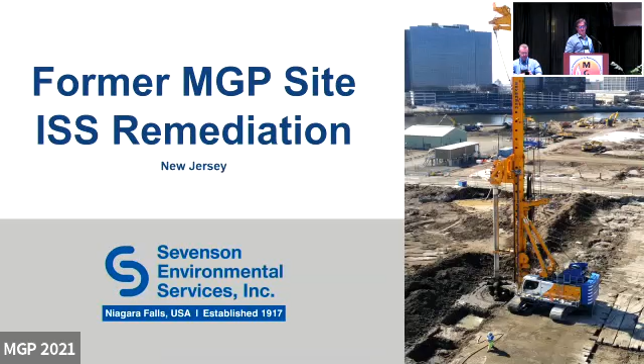So I'm here this morning. We're not going to talk about graphs or amoebas. We're going to warm our brains up to start the conference this morning so we can get into more technical stuff later on. I'm going to present a project we worked on over the last few years, an ISS remediation project in New Jersey. We got some lessons learned at the back of it, but we'll give you an overview and the flavor of the project, and some things on the engineering side, the contractor side, and the owner side that we can discuss further later in the program.

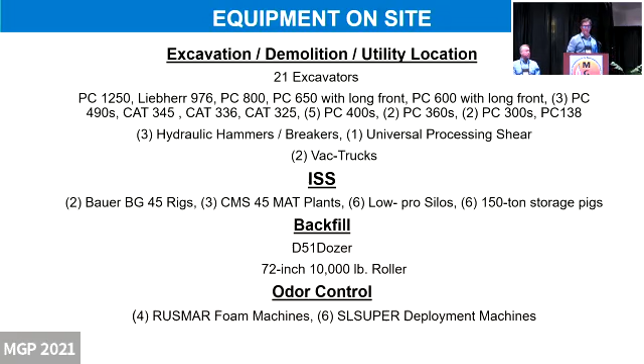I want to give you a little flavor of the equipment we had on site for this project. We had a PC 1250, a Liebherr 976, very large equipment, 21 excavators on this project to maintain production in the field every day. We had hammers, vacuum trucks, 2 Bauer BG45 drill rigs, 3 grout plants, 6 low-pro silos, and 6 150-ton storage pigs on the site. For backfill, we had a dozer and a roller. For odor control, we had 4 Rusmar foam machines and 6 SL Super deployment machines for SL Super, Biosolve, and similar products.

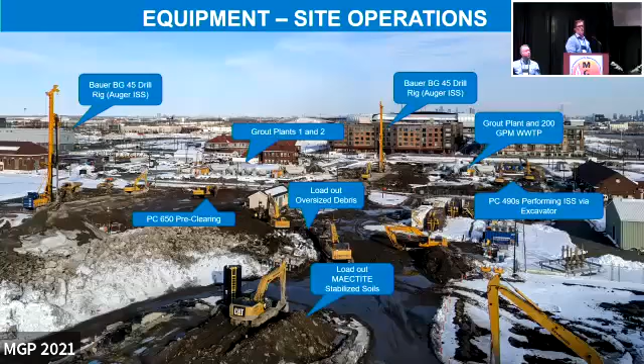This is an overall look at the site operations within the confines. Again, this is a big site, 37 acres, bounded by a very urban area. You can see the BG45 drill rigs, 2 on each side, and 2 grout plants centralized in the middle, plus a third grout plant, and the 200 GPM wastewater treatment plant on the outskirts. We have an oversized debris loadout processing area, pre-clearing for obstructions, bucket mixing, PC 490 excavators performing ISS to the back right, and we're treating lead-contaminated soils for loadout in big bags at the bottom. So there's a lot going on in this project overall.

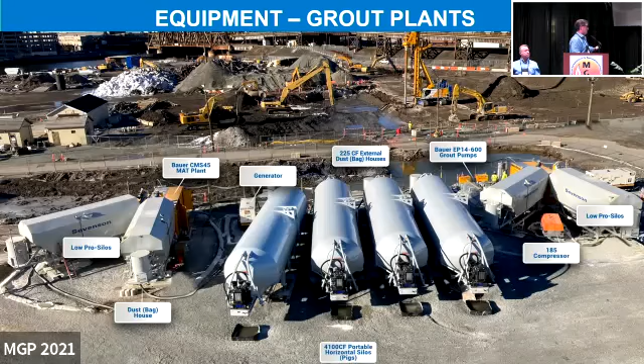This is grout plants 2 and 3, with all the components from power to storage to producing the grout. On this project we produced 60 million liters of grout for mass stabilization of the site. It was a logistical dance every day in the field to keep everything fluid. Roughly 25 reagent trucks, both slag and PC, came in every day. Everything was dust-controlled with bag houses, a perfect setup for what we had to do, with 750 runs out one way. The next day we'd change the grout hoses and move them to run the other way. Overall it worked out very well.

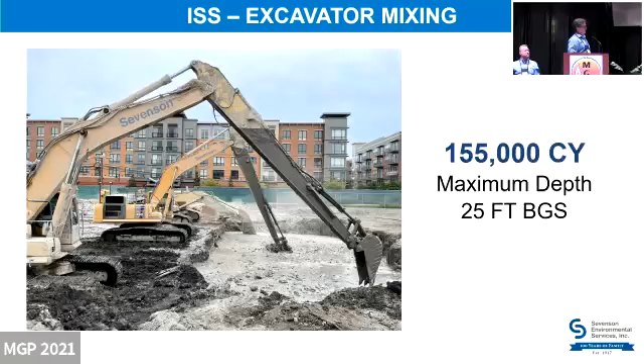We did 155,000 cubic yards with bucket mixing in some areas of a depth of 25 feet. We've had 2 to 3 to 4 bucket machines going on a daily basis. Some very tough material to get through, but you can see the work and the actual slurry that was being made in this particular photo.

On the drill rig side of things, there's a 10-foot diameter drill rig. We did 270,000 cubic yards with a max depth of 45 foot BGS, below ground surface.

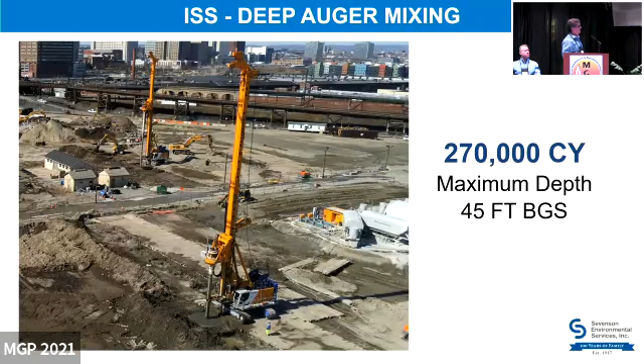The drill rigs had a state-of-the-art controlling device called the B-tronic system from Bauer. It gave us verticality, crowding force, blade rotation speeds, XY axis on all components, amount of grout liters injected, and feet per second of injected. This provided a great rig report at the end of the day for a QA QC type of report.

We could also log into this system remotely. We could watch from the home office exactly what the drill operator was doing, why maybe one drill was lagging behind another. We could log onto the system, find out if he was in harder soils, or if he hit an obstruction. Think of the data that this provided us - it was fantastic for QA QC reports. We could download probably about 1,000 columns within the system, find automatically with the GPS, get right over center drill point, and hold verticality down to those depths. So it was a great tool for this project.

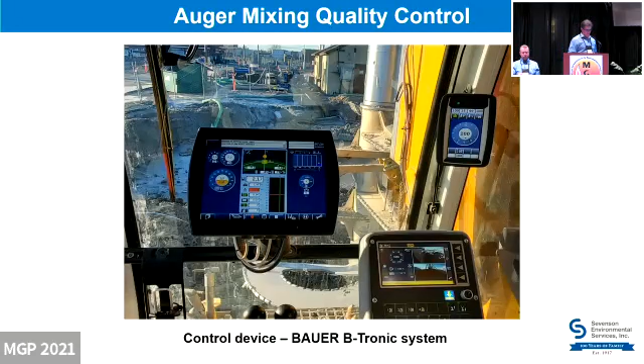Oh, I got her back. Sorry about that. So we had some other interesting components to the project.

We also had DeWind One-Pass trench on the site. We did 2,200 lineal feet of cutoff wall on this site, with depths up to 100 lineal feet deep.

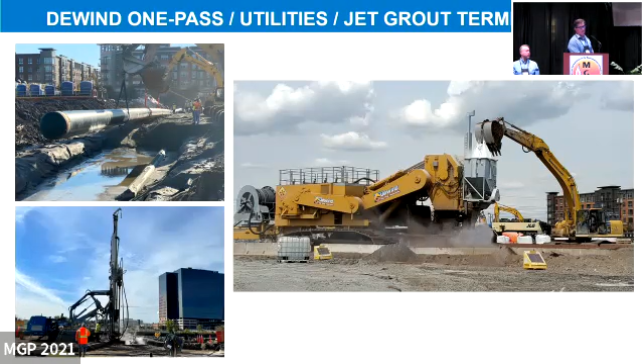On the bottom left, we had jet grout terminations around this gas line once it was done, to make a continuous plug to finish off the 1-pass wall. Depths of the jet grouting were 80 to 100 feet, covering a large area on the bottom of the facility.

So I wanted to talk about a couple lessons learned here. In the ISS type work in the arena, pre-clearing can't be stressed enough. This particular picture here is probably about 2 months into the project, and the amount of concrete and pier piles that we pulled out of the ground just to enable us to drill were enormous. It was an activity upon itself, besides all the other nuances of the job. We were pulling out concrete and pipe the size of small Volkswagens, processing them, sizing them. So I can't overestimate the importance of the pre-clearing here.

If they say it's down 7 foot, go 10 foot, because all it does is cause issues later when you're going to get a mix and you have an obstruction within it. It makes it a little bit easier - otherwise it slows the job. You've got 60, 70 guys on the job, the ISS drill rig comes to a crawl, you don't have any advancement on the drill. And then you start getting into conversations with the owner and the engineer about why you can't advance. You didn't pre-clear good enough, you weren't thorough enough with the removal.

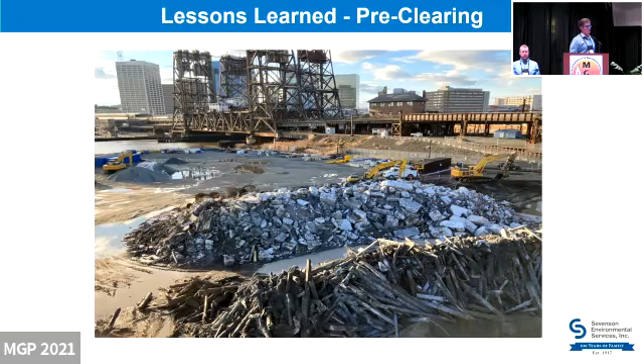On this particular one, we put out about 28,000 tons of concrete, and over 50,000 wooden pier piles were removed from the project depth. So the old historical structures on top - everything was supported by wooden pier piles within the hole. So we had a double layer of obstructions to pull out.

So we had another issue on the site. This was a meadow mat, which is a defining layer between almost water table and the natives or imported soils on top. The platform was to pre-excavate 7 feet, and the meadow mat was at -9. So we had a 2-foot buffer between the meadow mat and our stabilized platform to be able to work off of. So we found out that we had obstructions below 25 feet.

So what happens? You puncture the meadow mat, you start getting a tremendous amount of water in your excavation, your platforms, and the stability that you've got to put a 500,000-pound rig on starts to become compromised.

So what we had to do, instead of drilling and retreating as usual, was drill in advance out onto the meadow mat. We pre-cleared areas and got all the obstructions out of the way, then had to work from an edge and work on previously stabilized material in front, stabilizing primaries and secondaries in the middle as we went.

We had to find long runs where we could run this machine for 200-300 feet in areas that we pre-cleared, taking 7-8 days to go down to the end. Then we'd get all our QC data back from the laboratory, making sure the compressive strength was in order to get the rigs all pre-engineered.

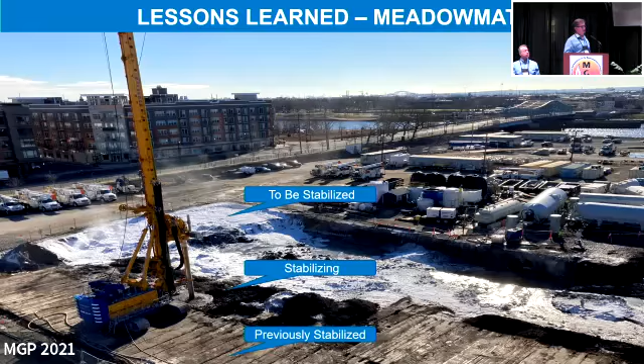We also had a very, very urban environment, as you can see here. Within about a half mile, we had 25,000 receptors in this area. We had an active PATH station nearby, an active facility, the utilities still working, and a little stadium in the backside.

So on this particular job, we used 365,000 gallons of foam for odor control, and another 76,000 gallons of Biosolve SL Super on the project, just to control odors. You can imagine a 37-acre site, we had to open up a lot of face, and we went through three seasons - hot, cold, hot, cold. We all know what happens in the summertime trying to control this.

I can't emphasize enough the amount of odor control and concern that we had around the community. We had constant outreach from the owner to the community, and a great group of air monitoring. We'd have odor walks every day just to try to maintain a sense of troubleshooting the project. But all in all, we did very well.

I can't emphasize enough the importance of odor control. It's one item that you really don't want to fall short on, especially when you're designing or building.

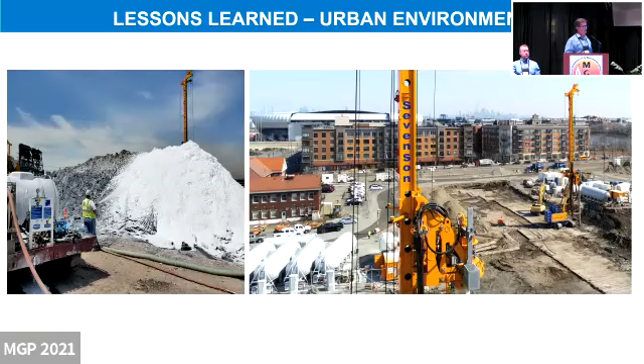And that's all I got this morning, guys.

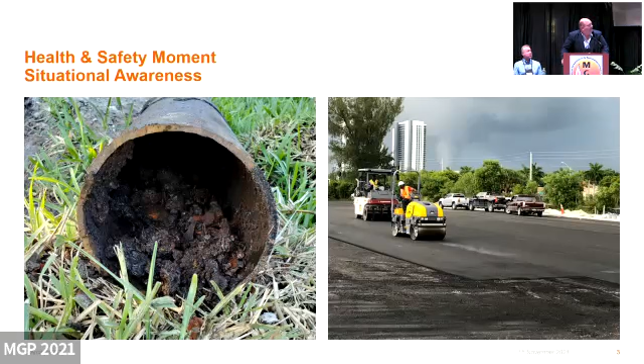So with that, I'm going to turn this over to John and he'll talk a little bit about the history and remediation.

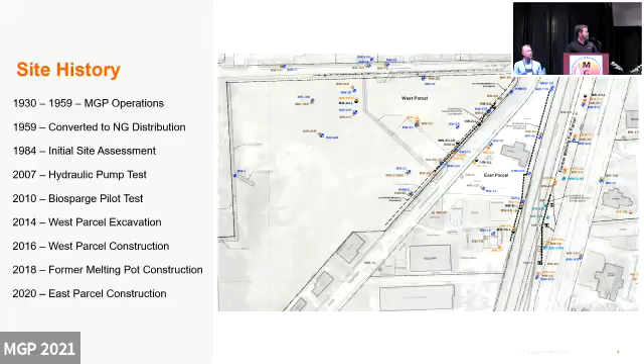The pilot test that mattered, or that we're currently following right now, is the biosparge pilot test, which started in 2010. You can see about every 2 years we did construction on this.

Okay, so I'm going to go through remediation quickly. We're doing biosparge and SVE at this site currently, but initially we did some soil excavation. So the west parcel is where we started, excavated, and then just more recently we did the east parcel. Typical stuff here: excavation top 2 feet, stained soils. We followed them down to the water table approximately and removed old structures.

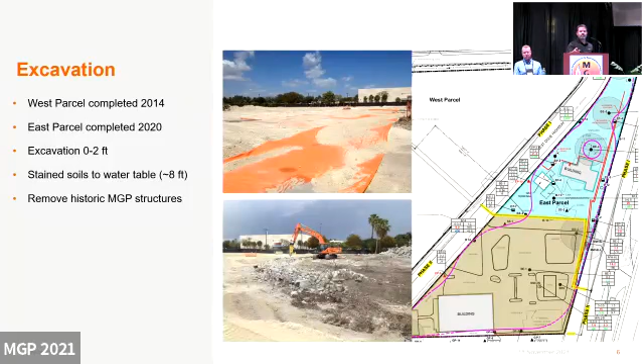The picture there at the top left is the delineator fabric that we have on the east parcel. It's obviously orange - that separates the excavation from the non-excavation. You can see below, we're pulling out a foundation for a tank as well. On this particular site, the excavation really covered almost the entire parcels. On the east parcel, for instance, the only things that were not excavated were the buildings. Everything else was pulled out, and also the regulator station, which you guys may see next to the building there.

Okay, so some interesting things about the remediation were the challenges we had with the installation. This is the west parcel, where we started first. Biosparge system, like I mentioned. The challenge we had here was West Dixie Highway was recently paved and the city would not allow us to touch their asphalt, so we had to bore under the road. With the amount of utilities out there, if we could find a way to not do a jack and bore under this very busy road, we were looking to do it.

So to our benefit, there were two 36-inch cast iron pipes that traversed the road between west parcel and east parcel, so we were able to utilize these pipes for our infrastructure. That saved us a potential utility strike.

One challenge we had is this put our SVE lines a lot deeper than we wanted. They're about 8 feet deep where we might want them typically around 2 or 3. So we had to install a sump on the east parcel side of the property because of that.

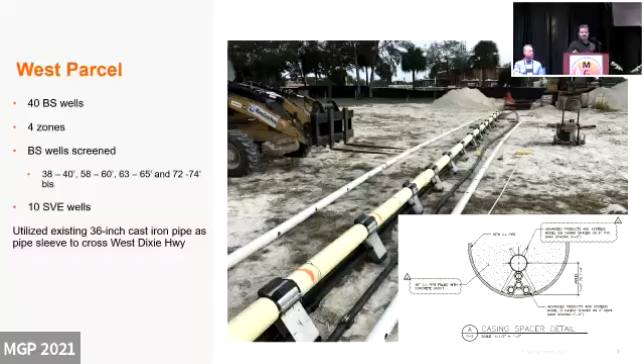Just moving on, I'm going to go through all of the different parcels. This is the former melting pot, much smaller transect of biosparge wells.

This is a kind of typical, almost like a gas station type air sparge system that you might have at some of your sites. The interesting thing here is we recently were able to get approval from the regulator to turn off the SVE system entirely, so we're just operating with the biosparge.

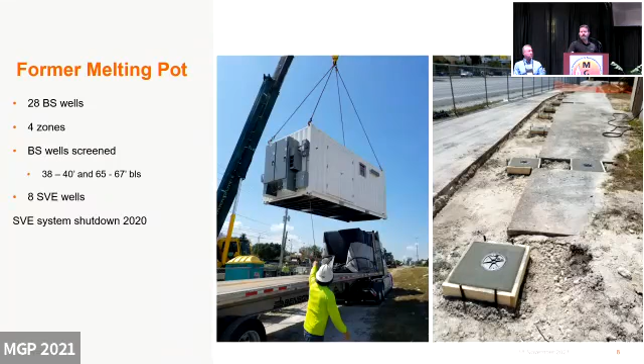The SVE, just so you guys are aware, was really put out there for methane control, which was a big concern for the regulator down here. This is Durham that runs this one.

Moving on to the east parcel, this is one of our larger transects. 63 biosparge wells operating in 8 zones.

Here, the interesting thing we did is this is a picture of the inside of the historic compressor building at the property. This building was built in about 1920, and as you can imagine, being in North Miami Beach, Miami area, property is very valuable. So we were trying to minimize our impacts or how much property we used up with our equipment. This was a historic building, so it had to stay in place.

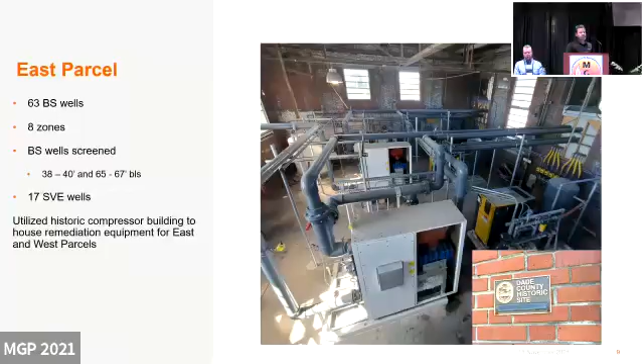So we utilized it to store our equipment in it. It was previously used just for equipment storage, so we moved some of that stuff out and put our equipment in there. You're looking at the blowers for the SVE system in the front, and the air compressors are in the back. So this is both the east and west parcels situated in this building.

And then just closing up before Mark gets to talking about redevelopment - another thing, as we touched the asphalt on the east parcel, stormwater came into play, and we had to do some improvements to what was there. Like I mentioned before, we had to maximize the usable property, but also considering the nature of the site, infiltration was really off the board. So detention had to be contained.

So what you're looking at here, and Mark's going to talk about it for a little bit as well, this is a product called Storm Trap, and it's a concrete structure used for detention of stormwater. This particular system you can build without a concrete floor or with a concrete floor. We built this one with a concrete floor, so everything is contained within those structures.

There's two of those, one on the north end, one's on the south. The south is a little larger, as you can see. These structures discharge into injection wells, and that's the picture at the bottom left there - that's one of the injection wells, that's the vault being installed there.

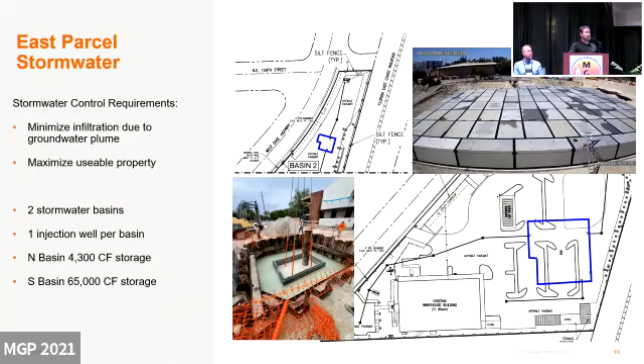And these injection wells are designed, they're cased to approximately 80 feet, and they discharge below any groundwater impacts. So this was a way we were able to maximize the owner's property usage and also avoid impacting our groundwater plume. So I'm going to pass it on to Mark, he'll finish up.

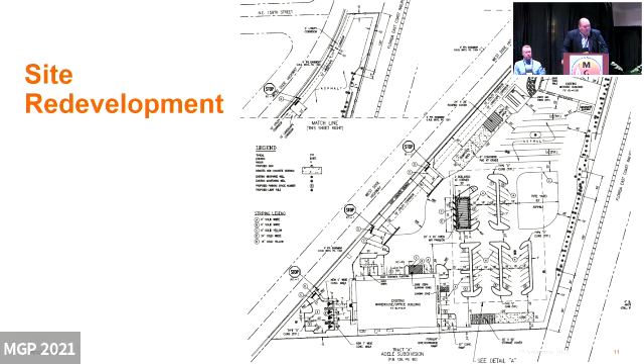Thank you, John. So in moving to the installation and remediation of the site, when we showed up, most of the site, as you can see in the pictures here, was gravel and grass, dirt. There was a small area in the south that was actually paved and used next to their facility. The rest of the area was the lay down and storage. So when we first got there, we had to do an unusual clearing and grubbing.

We were able to get there and help TECO. You see here on the left, the side where the SVE wells are, we had to go and help them - they had a lot of old stuff, they'd been there since the 1900s. So with most people who were around long, you start collecting and having things. So we were able to help them.

This picture on the right's a piece of equipment that wasn't working - you see we had a tree growing through the engine. We came there with big equipment, and we were able to pick up, move, and help them load this - things they weren't able to do themselves. We were able to get there and start, and when we started the remediation, we also came in and helped clear their site and make it available.

One of the things that is unusual about this site is that it had to remain active. This facility services the whole Southeast Florida, and all of the emergency response, all of the utility strikes, breaks, repairs, leaks are run out of this facility. This facility had to maintain operation 24/7, 365. We could not shut the site down, we could not impede their work at all.

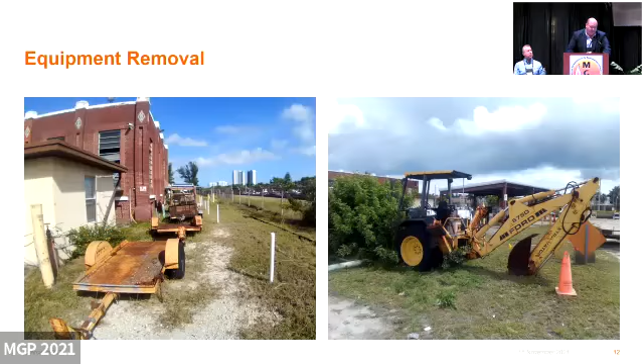So one of the things we did, here's a typical contamination you might see at MGP sites: the tar, the goo. The middle and right pictures show the tar pit by the old historic building.

This is an active site and TECO has people showing up every day to work, so we had to make sure that when we did these activities, we weren't exposing the workers. This was a concern of TECO, the regulatory agencies, Arcadis, and ourselves. We wanted to make sure everyone who worked there was safe and not exposed.

This took some special steps. We had to put physical barriers, temporary fencing, at a safe distance to keep people from coming into our work zones, and to keep them from being exposed we had constant air monitoring. This pit, when we were digging it, we had to go to level C because of benzene.

There was another area on the site where the same thing happened, and it was a great concern that people just coming to work every day weren't exposed to this. So what we did is sequence the whole site. We divided it up, and in order to take land from them that they were using, we had to provide some place on site for them to use.

So we started with the north end, cleaned and prepared the north side of the site, brought it up to asphalt, and then cleared the western section to give them a clear corridor to the building. So as people came to work every day, they could park and then go, because currently they park down south. And as you'll see in some slides later, we completely took their parking to finish this project.

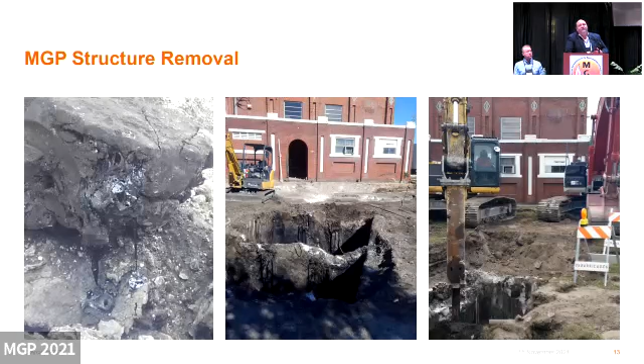So here we are on the west side, clearing it down to the building. Here's one of the regulator stations. You can see from the pin flags on the left, we have a lot of gas lines coming and going there, so that's all handwork. We had to get out there and excavate by hand.

In the middle picture, you see we have some MGP lines on top of the active gas mains. Those all had to be removed, cut out very carefully. That facility right there supplies all North Miami Beach and Miami Beach with gas.

And of course, being a 100-year-old facility, there are all kinds of utilities out there. We took a lot of effort, did some geophysical investigation, identified tons of anomalies, and had to go out and do some soft digging. That picture on the right shows us soft digging, trying to identify the anomalies and figure out which utilities were live versus the myriad that were no longer active out there.

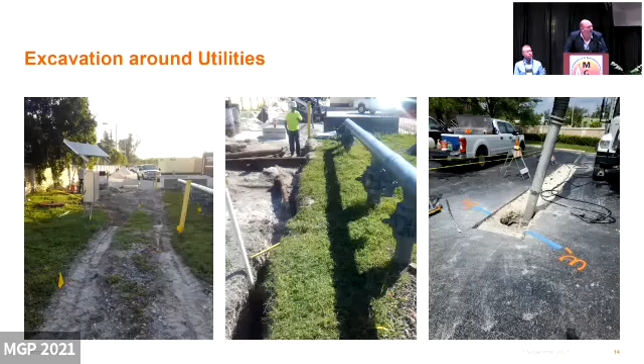Once we'd completed the north side, we had a west side corridor for the employees to park their vehicles and then walk down to their facility. That facility is a call center.

It takes the 800 numbers for emergency breaks, hits, and responses. That facility had to remain open, people had to come to work every day, so we had to make sure they had a nice, safe pathway.

We looked at many options, spent a lot of time trying to figure out how to get them from the north side or from somewhere else. We thought about parking them off site, busing them in, having them park across the street and cross West Dixie. None of those options were really viable.

We came up with this corridor, and my operations manager, Josh, had found this product. This blue runner is designed for people with disabilities to gain access to beaches. It's designed to be laid out across the sand to give them access to the ocean and beach. We took this product, utilized it here, and it worked beautifully.

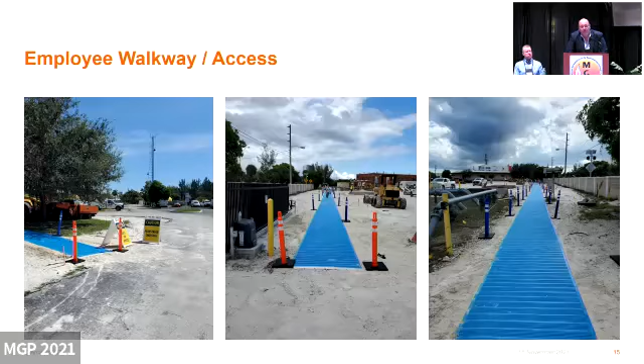Instead of having to build a sidewalk or put down temporary asphalt, all costly and wasteful, we were able to use this product, and it was recycled after this project. It was given back to TECO, and they used it at another facility. A really great solution. So here we are with the drainage wells.

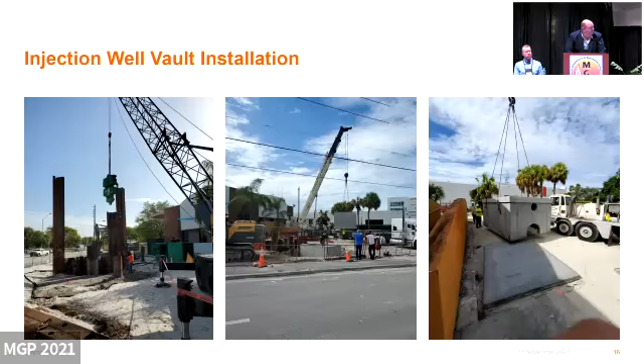So here we have on the left, the bottom piece already installed in the cofferdam in the front of the property. In planning this out and thinking about it ahead of time, we're like, well, once we get in there, what do we do? Because it's confined space entry. It's not easy to get to. So how are we going to disconnect the crane? You can't have it sit there for a day.

So again, Josh had come up, he saw this gangplank. They went and got a portable one, and we utilized that. On the right, you see that's the northern well. We put it across there, and we're able to go check the elevation and placement of the bottom structure, and then go ahead and disconnect it safely without having to get into the structure itself.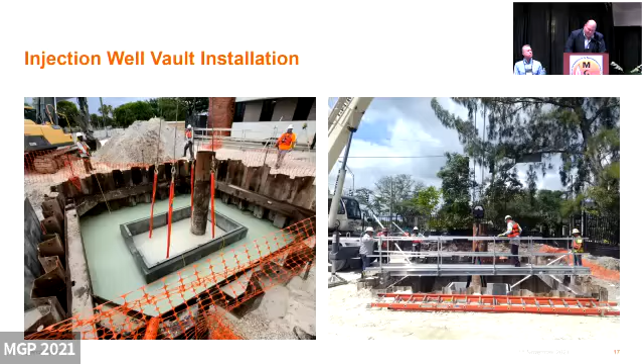So here we go. This is the real estate part, right? We took up everything. This is what John was talking about. You can see from the picture on the left that the drainage structure takes up a tremendous piece of the property. The whole southern parking lot was basically taken.

So before we could do this, we had to displace TECO, which we put to the north of the old building. We even rented a property across the street as a laydown area for their piping. Because as well as repairing utilities out of this yard, they also support all the construction in South Florida of the new lines and upgrading of lines. So every morning, 20 or 30 contractor trucks roll in to get loaded with these pipes and fixtures from the warehouse. All of that activity had to go on every day. We couldn't shut them down.

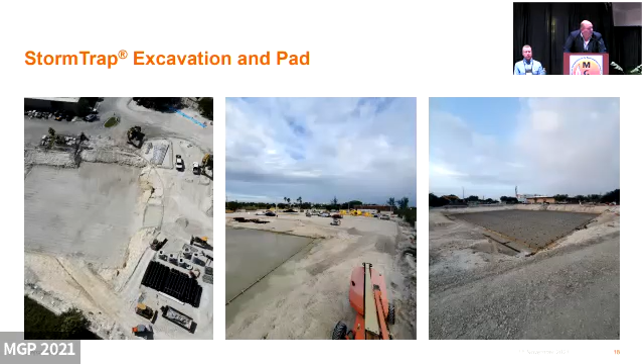So we had to figure out ways to get them in there. In the middle photograph, you'll see we have their pipe and some of their emergency response vehicles nestled in with us there in the middle of the property. Again, through coordination, maintenance of traffic, signage, spotters, we were able to make all this work. And there on the right is the foundation for the storm trap. It's formed out, rebar in there, 1 foot on center, getting ready for the pour.

This slab had to be perfectly on grade and smooth in order to place the pieces of that storm trap. The tolerance between these pieces when they're set together is very small. They have to fit together perfectly like a big jigsaw puzzle. So it was very important we had this finished properly. About 5 or 6 that evening, we were doing the relief cuts on the slab, and then it was covered and tarped for curing.

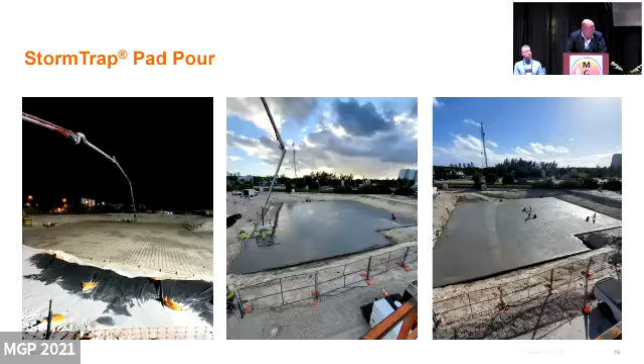They were numbered. Everything was put together. We had a map, and we had a guy on the slab as the crane was bringing them down, placing each structure where it had to go. This took tremendous coordination. We're loading these trucks the day before in Central Florida, and they're coming down.

They have to arrive in order, in a time sequence so we could place them and get them off. And the whole time we're bringing 20 semi trucks through TECO's property, we have to keep them operational.

Like anyone who's had renovation in their house, it's annoying and frustrating to have someone come in and disturb your house, and we were there for 2 years. So they had tremendous patience and were tremendously helpful to get this done. This took a big team effort.

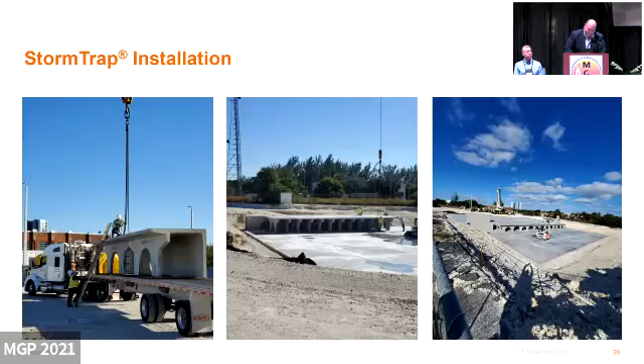Here on the left, we had a 250-ton crane setting these. We could only reach halfway across the pad, so we had to set up north and south. Here on the left, we have the south setup, finishing out, placing the pieces.

In the middle, we have the structures all in place and we taped all the joints. All the joints were sealed with a mastic type tape, and the bottom as well. As John said, this was not an exfiltration - it had to hold the water and then it would gravity flow into the well.

The flow line is flat out of the structure, at elevation 4 all the way to the well. So the water just finds its way, and during rain events, it builds up here and then runs to the wells over gravity.

One of the unusual things, and one of the things I think was very beneficial for this project, was having one contractor not only do the remediation, but also do the restoration, because we were able to plan. All this hopping and skipping around over 2 years would have been an absolute nightmare if we had a secondary company out there doing the restoration, because they would have to stop and come back a year later to finish. Under one roof, under one control, we're able to plan ahead.

This picture is an instance of that. We had the surveyors come out and plot out the parking islands, because under asphalt, Dade County requires you to have chases - 4-inch chases for all the irrigation pipe at 36 inches in depth - which puts it right on top of the structure. So 4 or 5 months later, irrigation's coming out, but we had to have this planned out.

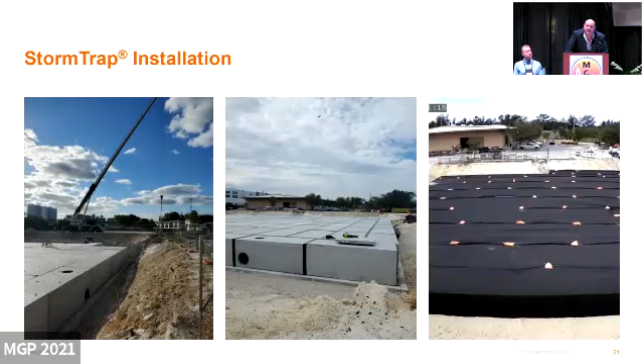That's a new metal structure we constructed for a CNG station. They have a compressed natural gas station, which they use to fuel their vehicles, or some vehicles of theirs. That's going to be reconstructed and back in action here in a few months.

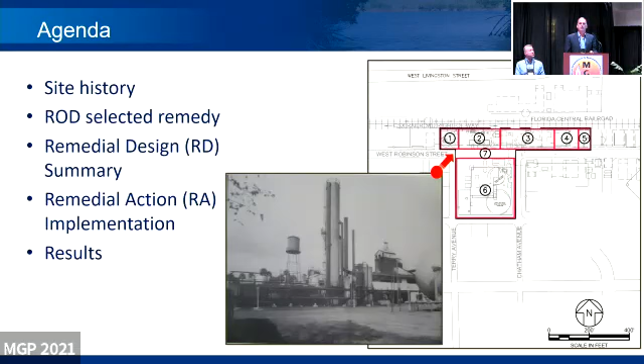And just like any MGP presentation, it wouldn't be complete without a classic old image of what it looked like back in the day. So there's your early 1900s shot. I've identified the vantage point of where that photo was taken, and the site's actually in downtown Orlando. It covers a number of different parcels in this downtown area, which I'll be discussing.

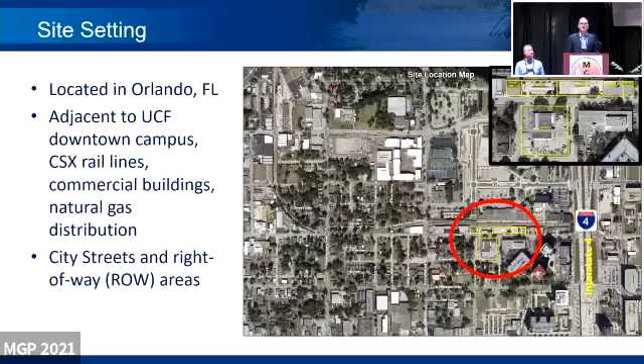So as I mentioned, it's located right here in Orlando's downtown area, right in the heart of downtown. It's adjacent to the UCF downtown campus, bounded on its north side by CSX rail lines, and surrounded by commercial buildings. There's also a natural gas distribution hub located in the southern parcel of the site, plus a network of city streets and right-of-way areas that are part of the project area.

Zooming in, you'll hear me refer during this talk to different parcels. On the north side, starting on the west, basically parcel 1, 2, 3, 4, 5, running west to east, and then the larger parcel on the bottom is parcel 6. We coined the term parcel 7 for the streets and right-of-ways. You can see the CSX right-of-way running along the top of parcels 1 through 5, and just beyond that is UCF-related building infrastructure.

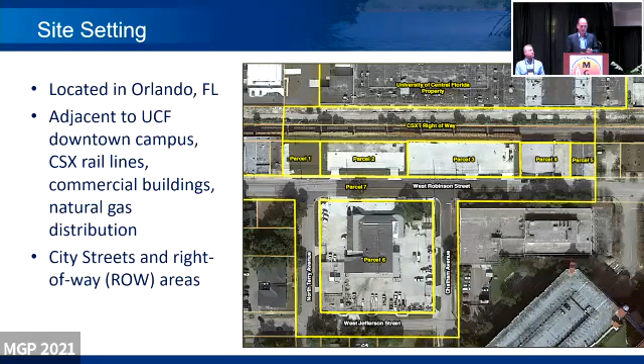So a little bit of the history: this was a former MGP operator from 1887 to 1959. Those operations introduced MGP residuals into the environment. A multi-party PRP group was established in 2002, so several entities are contributing to the cleanup of this operable unit. Remedial investigations were conducted in the early 2000s to about 2012. The RIFS was prepared and authored in 2013, and the Record of Decision in 2013 selected the remedy for OU1.

OU1 at this site is essentially the surficial aquifer, 0 to 60 feet. Out here, at about 55 to 60 feet, it varies, but you hit the Hawthorne clay, so everything from the Hawthorne clay up is OU1. I won't be talking about it, but OU2 is another whole big issue—OU2 is the groundwater associated with the Floridan aquifer, down a couple hundred feet.

You could generally see in the old historical aerial image a lot of operations on the north side of West Robinson Street, but there were also big gas holders and such on the south side where parcel 6 is, which were used for the distribution network. As you can imagine, a number of pipes crossed West Robinson Street back and forth as this facility was constructed, and then over time, modified, built, and added to.

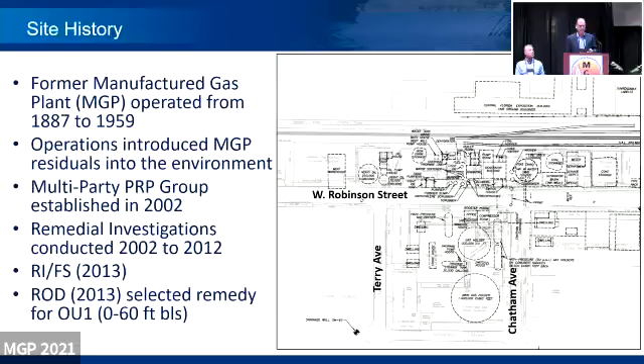Before I really get into the remedial action implementation, I wanted to go through some of the general elements of this site and the ROD, basically what we're having to comply with as we do implementation and design work. So it covered excavation and disposal of surface soil.

That's 0 to 2 feet, basically on all these parcels 1 through 6 in the right-of-way areas. ISS of mobile NAPL, removal and disposal of former MGP structures. When I say mobile NAPL, we ended up developing a definition for mobility to define what mobile NAPL actually was, and obtained EPA and DEP approval on that.

So we could go out and characterize what is mobile NAPL. D&D of buildings out there - parcel 2 and 3 had some different structures that were going to be coming down. An engineered capping system around the footprint of essentially the source area, which is the area that was defined with elevated groundwater concentrations and MGP residuals.

Installation of an ISS barrier wall around the perimeter of the source area. Hydraulic control within that barrier wall, or some mechanism to keep the head down inside the wall. Implementation of a short and long-term groundwater monitoring program. And then following that short-term groundwater monitoring program, implementation of MNA or biosparging, depending on what the results of the short-term monitoring look like. And then, of course, identifying and implementing institutional controls associated with the project.

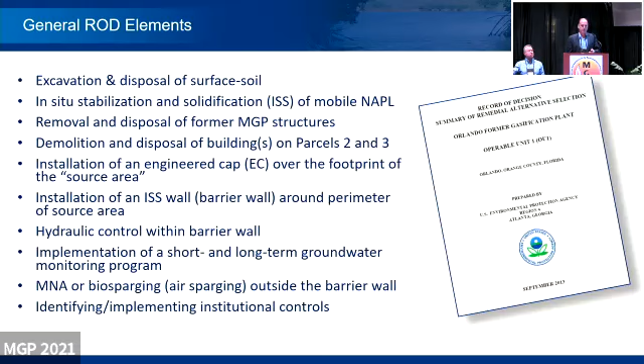So Geosyntec basically got involved in this project right after the ROD was executed. One of the first things we were involved with was the pre-design investigation, all the work plans leading up to that, and then implementing these pre-design investigations.

One of the things that we did find early on as part of the pre-design investigation was that the dissolved groundwater plume north of the railroad lines has much higher concentrations than were shown in the RI. Based upon that, it was pretty obvious that short-term MNA wasn't going to be an effective solution for groundwater, and you'd ultimately have to be doing something down the road from an active perspective.

So we actually used that as part of our discussions with the agencies to come up with some other modifications that facilitated constructability of ultimately the barrier wall remedy, which I'll discuss. When we did the pre-design investigation, we didn't find any mobile DNAPL, but we did find 2 areas of mobile LNAPL. You can basically see on the bottom here, they're kind of in the area of parcel 2 and 3 on the north side of West Robinson Street, a couple pockets of what was identified as mobile LNAPL.

We did ISS treatability studies, and then also refined the barrier wall footprint. So the original wall configuration was the blue line. That represented obviously some pretty significant challenges because you'd be crossing a major street, a roadway.

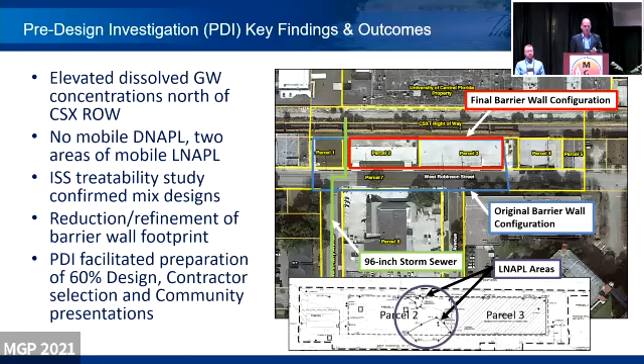At this site, the pre-design investigation work facilitated the preparation of a 60% design. So once we got to the 60% design, we got that approved by the EPA and DEP, and then went with that document out to bid and contractor selection, and also used that to do community interaction and community presentations.

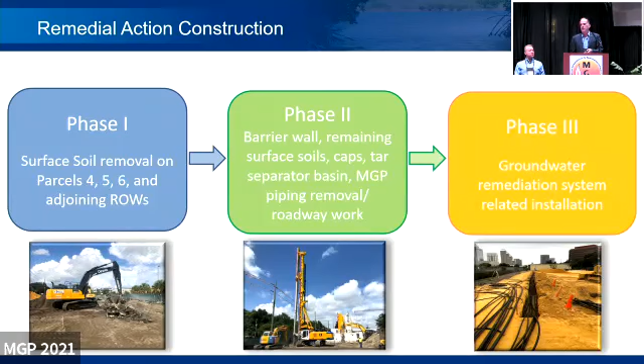So I'm going to get into the remedial action, the construction work. I break it into 3 different phases. Phase 1 is surface soil removal work related to parcels 4, 5, and 6 and adjoining right-of-ways. Phase 2 is the heavy hitting barrier wall, soil surface caps, MGP piping removal, separator basin, all that type of stuff. Phase 3 is the groundwater remediation related elements.

They all had some overlap. Phase 1 was surface soil. We prepared a surface soil removal work plan for parcels 4, 5, and 6. This was actually performed in advance of the RDRA work as a way to demonstrate progress. The agencies really wanted to see progress, the city wanted to see progress, and the community wanted to see progress. So we advanced part of the project outside the scope of the main remedial design.

Handling these surface soils that way was easy to do in terms of advancing the project along. That work was implemented by Action Environmental from May 2018 to October 2018, involving removal of 2 feet of soil. You can see in the yellow area the large parcel 6 area and then parcels 4 and 5. We replaced concrete parking areas, sidewalks, and 2 feet of clean backfill in pervious areas. Parcel 6 was a lot more complicated than just going out there and ripping up 2 feet of surface soil.

It was an operating facility and needed to stay operational. That facility was divided into quadrants, with removal of 2 feet of soils and the surrounding streets done in staged elements as it was taken care of, as well as removal of large former gas holder concrete pads, then replacing everything and doing restoration work.

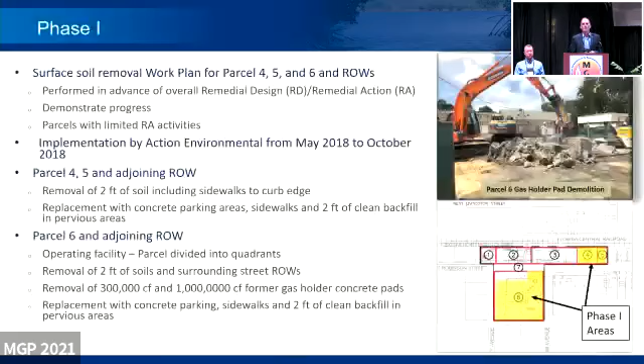So phase 1 involved removal and disposal of a little over 5,000 tons of soil, almost 2,000 tons of C&D debris. Some lessons learned associated with doing all this work on these smaller piece parts.

Utilities - locate them. Beyond just getting your 811 locates and private utility locates, really consider the institutional knowledge of actual facility personnel, because they know a lot. These sites, as you're mostly aware, are a hodgepodge of layer-caked utilities and pipes and everything else. While a private utility locator may figure out most of what's going on, he may miss something.

In a few instances early on, we had that happen where a gas line was only 6 inches down and nobody knew it teed off with a little branch. But when we talked to facility people, they'd say 'oh yeah, back in 1982 we did...' So once we figured that out, whenever we'd go to dig an area, we'd get all the utilities marked and then bring out people with institutional knowledge to walk it and say, what else do you know that the marks on the pavement aren't showing us? That was very helpful.

These holder pad slabs are a lot thicker than the GPR led us to believe. We thought they were 2 foot thick, rebar reinforced, but they actually were more like 5 foot thick, rebar reinforced. So something to keep in mind.

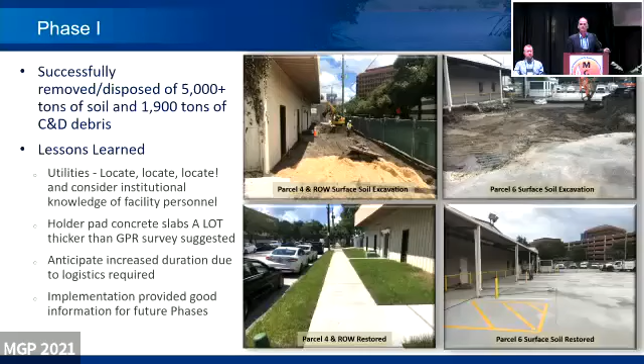Phase 2: the contractor Forgen was selected at the 60% design phase in March 2018. With Forgen on board, we worked to finalize the final design, get it submitted and approved by DEP and EPA as of September 2018. After finalizing that design was a whole flurry of work plans associated with implementation and permitting, so we could actually get out in the field and begin working.

We also established and implemented a third-party multi-station perimeter air monitoring program, using four or five different stations around the periphery of the site area, initiated a month before construction began. Phase 2 construction was initiated in April 2019, involving some initial demolition of buildings.

DPT coring - one of the things we did around the entire periphery of the barrier wall was every 20 feet, to satisfy the agency's needs, do coring to visually confirm the actual contact depth with the Hawthorn formation.

So we can then confirm the exact key-in depth for the barrier wall panels as we continued around on the project. Clearing of obstructions - that's a big deal at this site, lots of historic industrial archaeology. You see the layer cake of, back in the day, the way to redevelop or add onto an MGP site was just push the old stuff down, bury it in a layer of concrete, and build the next layer on top of it. You'd literally see the layer cake of construction over the decades.

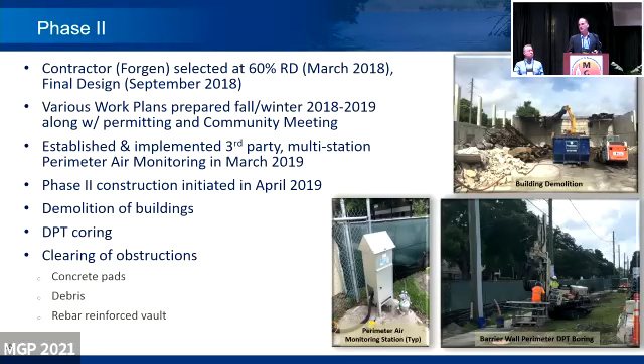Clearing of those obstructions, pads, debris - we found a rebar reinforced vault that was unknown. That was basically a 23-foot deep rebar reinforced vault, full of coal tar, right against the CSX right-of-way rail line. So some interesting challenges with that.

A little bit about the barrier wall design itself and the ISS. It's designed, based upon the results of the treatability testing and modeling, with an average hydraulic conductivity of less than 10 to the -7, with no sample greater than 10 to the -6. Minimum barrier wall thickness of 2 feet, minimum key into the Hawthorn group sediments of 2 feet, UCS unconfined compressive strength of 24 PSI or greater, total barrier wall length of 1,002 feet.

It started out, when I showed you the original, a little over 1,400 feet, final total length of 1,000 feet. It was ultimately constructed using a panel construction method, Bauer CSM rig with overlapping and staggered panel construction. The sequence shows you're doing a panel, moving over several feet, doing the next panel, then coming back within the next day or two and cutting with an overlap between those panels, working your way around.

And then the 2 NAPL ISS areas had to meet those same hydraulic conductivity and strength criteria, and those were bucket mixed to a depth of 16 to 18 feet or so in those areas.

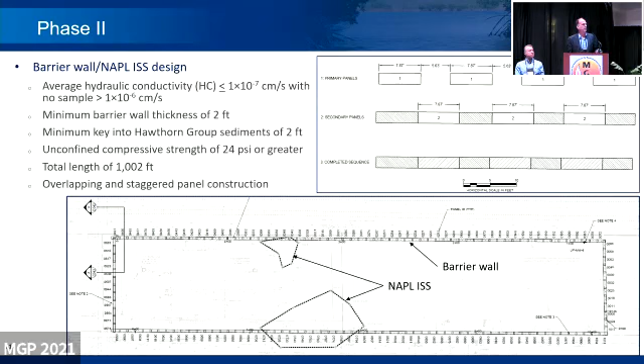The barrier wall construction occurred from May 13th through July 2019. It was a double wheel cutter soil mixer, 25-inch width. The cement plant was located on parcel 1, just west of or outside the barrier wall. Total of 148 panels, average depth of 57 feet.

CQA samples were collected throughout. The results revealed a 28-day unconfined compressive strength greater than 24 PSI, substantially greater, an average hydraulic conductivity in the 10 to the -9th, and a maximum value of 6.5 times 10 to the -8. So we greatly exceeded the design requirements for the barrier wall.

Just a couple shots of the cement plant, the rotary cutter head on the Bauer rig, and the panel construction.

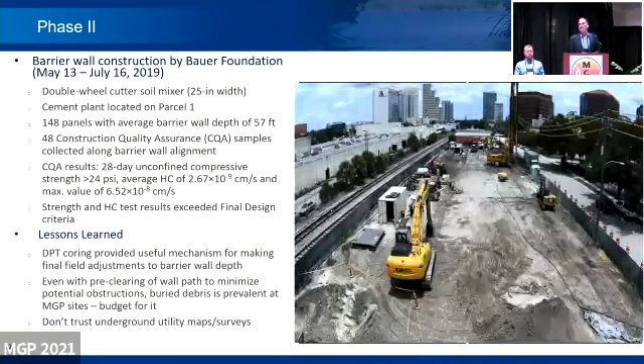I've got a little video clip showing some of the construction along Robinson Street. You can see the rig with the giant tarp over it - that was basically like a mud splash guard, so as mud would splash it wouldn't hit the street and get on cars or anything. That actually worked real well.

The cutter was able to, using the CSM rig, run along where the utilities were without having to take them out of service - they were just able to shield the utility lines.

Some lessons learned: the DPT coring really provided a useful mechanism for making final adjustments to the barrier wall depth. The elevation out there is flat, but the depth to that clay does undulate a little bit - we saw about a 4 to 5 foot variation in total panel depth throughout the project area over that 1,000-foot run.

Even with pre-clearing of the wall, we still had buried debris issues - that was discussed in the first talk as well. That's a problem; if you're doing design work on these sites, plan for those types of things. You're going to come across it, even if you pre-excavate your whole length of barrier wall, which is what we did here, down to 10 or 12 feet - we still ended up hitting stuff.

And again, don't trust your underground utility markings and surveys. We found City of Orlando water lines that they didn't know they had, or they said were not their lines - we're like, well, we've got potable water coming out of the ground. It was underneath some of these old MGP pipes, so just keep that in mind.

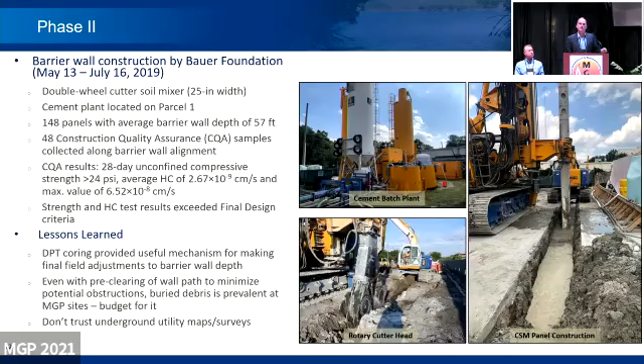Additional items done during phase 2 of the ISS of the mobile LNAPL area included excavation of a large tar separator basin located on the site. That was all removed within a couple of days, which was good, because that was the one portion of the project that really had some odor-related issues.

After that, we went ahead and removed the surface soils associated with parcels 1 through 3. As they started doing this, they began transitioning into phase 3, basically installing the remedial system piping and such.

Lessons learned: the tar separator removal portion generated the most odors, and odor control foam worked really well for abating them. We minimized handling and maximized the rate of removal to minimize those odor-related issues.

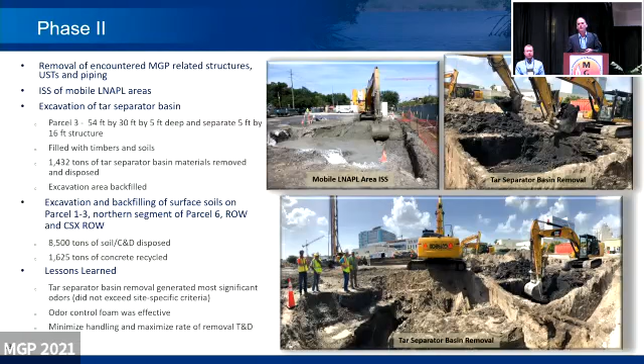West Robinson Street was a big deal. The design identified 9 pipes and 6 crossings. We were looking at removing about 2,000 square feet of road, and the road is underlain by historic bricks. That became a big issue, dealing with the historic bricks.

We implemented that December 2019 through January. Ultimately we found 23 MGP-related pipes crossing the road, which ended up requiring removal of a 450-foot section of roadway.

14 of those pipes we removed. For 9 of the pipes, we got EPA or DEP on site, we opened them, and there were no MGP residuals in them. They approved that those could remain in place, so some pipes were left in place.

We ended up having to remove over 12,000 historic bricks, counting every single one, because we had to replace them all. Then 20,000 square feet of street needed to be resurfaced when we were done.

Lessons learned here: count on the smallest item to be the biggest headache. Those historic bricks probably involved multiple conference calls with 5 to 10 attorneys, haggling and debating on how to handle a historic brick issue. Never would have imagined you can spend so much time and effort dealing with some silly bricks, but here we did.

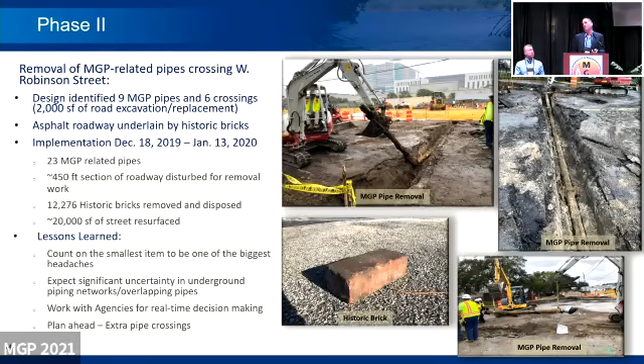We worked out real well with the agencies, who helped us with real-time decision-making in the field and planning ahead. Once we had the road open, we knew we were putting in a remediation system, so we put in a whole bunch of extra conduit and pipe chases so we could run remediation system piping through it for phase 3, as well as plan for potential work at OU2.

Phase 3 involves the air sparge SVE system. There's over 2,000 feet of trenching, and we installed 5.6 miles of piping in the ground associated with this. We also did a jack and bore beneath the CSX railway as a carrier for piping runs for the sparge and SVE systems.

Directional drilling was used to put in an infiltration gallery outside the barrier wall, on the east side where there's not groundwater impacts.

We also, as part of the remediation system infrastructure, put in these manifold box systems. You can see one set up in the upper right-hand corner, which basically lets you have zoned operation where you're blowing air or pulling water. It goes to these manifolds, and you can do your O&M just by opening these cabinets and making adjustments right there.

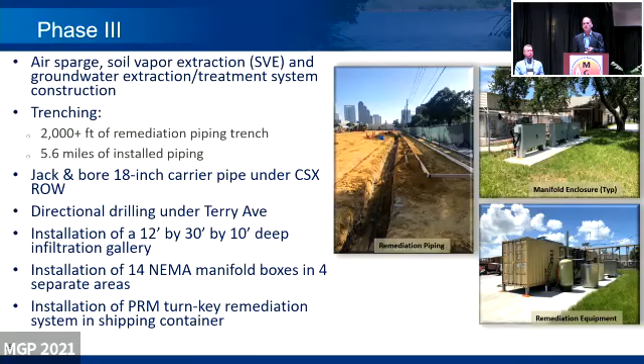It also involved installation of a turnkey remediation system in a shipping container provided by PRM, shown in the bottom right photo.

Just a crazy picture showing all the layout of infrastructure. The center of the project is parcel 2 and 3. You see the black dash line, that's where the barrier wall is. And surrounding that, you've got a network of air sparge wells, which are the orange.

Soil vapor extraction wells, there's only 15 soil vapor extraction wells. They were basically located running along where you have building structures - along the building to the north, a building on the west, and the building on the south side is where the SVE lines were run.

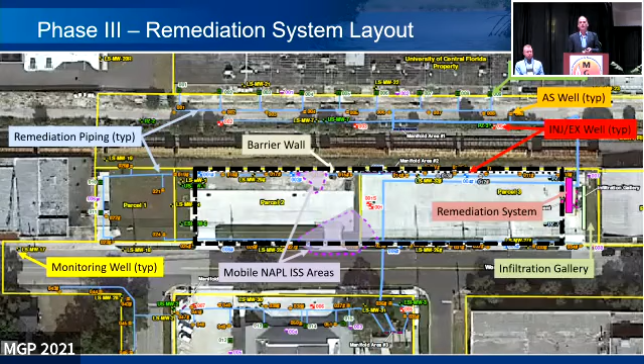And then a system of extraction and re-injection wells that were put out there. You can see the area of mobile NAPL, and the blue lines are all the pipe trench runs with multiple pipes running in them.

So the air sparge systems, 51 sparge wells. A lot of these wells are actually angle drilled. We could start at a location like right next to the wall, or in some cases even inside the actual footprint of the wall, so we can keep it on the PRP's maintained property. Then the sparge wells are angle drilled and get up underneath the right of way to the target depths.

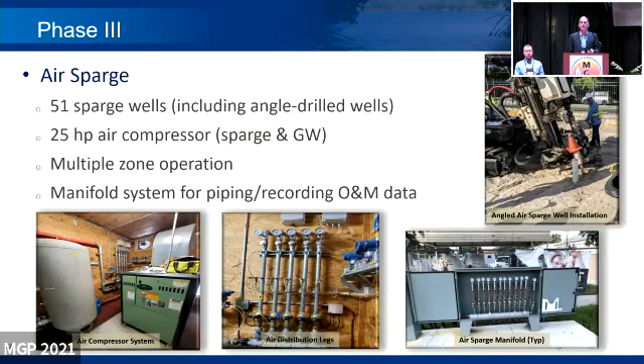With 51 sparge wells, a 25 horsepower compressor, it's got multi-zone operations cycled with lots of flexibility in terms of the operation of that system. Manifold systems out in the field for adjusting individual flow rates and pressures.

The SVE system is just intended to mitigate potential vapor accumulation underneath buildings. We've got 15 SVE wells, vacuum monitoring points, and a manifold system for recording that data. It's actually a dual blower system - there's a 20 horsepower and a 10 horsepower system, and they run basically in parallel.

Once we've started up operations, we're able to pretty quickly transition. We only run the one system at this point in time.

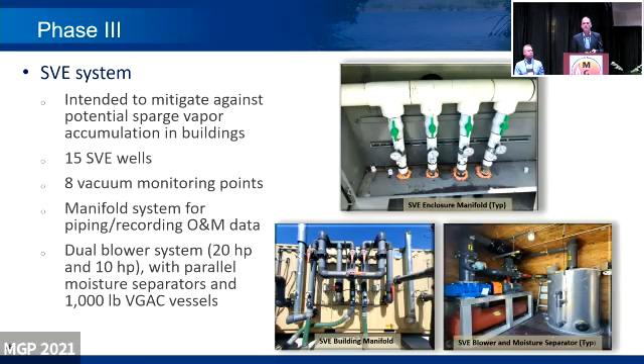Groundwater recirculation system - when we did the modeling at this site, when you put a wall in, you get this big stagnation zone on the down gradient side of the wall. We wanted to do everything we could to influence groundwater movement, create a dynamic environment in the subsurface outside the barrier wall.

So while the primary remedy outside the wall is sparging, the groundwater recirculation system was installed to enhance movement, contact, and distribution of aerated groundwater, clean groundwater, and movement in the subsurface. It involves 7 extraction wells, 8 injection wells, a pneumatic pumping system. The way it was designed, the 7 extraction wells and 8 injection wells can be flip-flopped - we can replumb and turn an extraction well into an injection well and vice versa.

Then you have 3 effluent disposal options for flexibility as well. We can go to the infiltration gallery, we have the injection well network, as well as discharge to sanitary sewer. Typically at any given time, we're putting a small portion of the flow, about 20%, to the gallery, and the remaining portion goes to the injection wells. We've rarely used the city sanitary sewer, but it's there in the event that we do need to use it.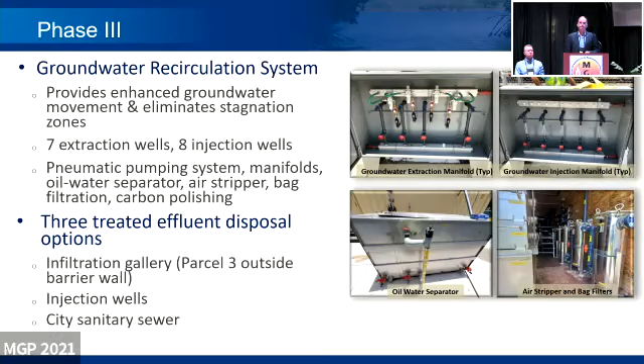The system was started in July 2019, with routine O&M. During startup, system sampling was initially monthly, and now it's getting transitioned more into a quarterly program, with semi-annual sampling reporting to the agencies.

Some lessons learned associated with these operations - having multiple discharge options and operational flexibility has been key. It lets us optimize and make changes to the system to benefit its operations without having to jump through a whole lot of hoops or doing design addendums and things like that.

For these more complex systems, include a lot of start activities that involve debugging. You're not just going to go out there and turn the switch and everything runs perfectly. There's a lot of debugging in terms of optimizing your operations.

The pumping system out here - since we were using air sparge, we figured we might as well use pneumatic systems for pulling water, since we already have air running out to these different manifolds. But these pneumatic pumping systems for water include some enhanced well development considerations.

We did find that we had some issues early on during the first 6 months - we were pulling quite a bit of fines into the wells. If I was to do that again, I would do a lot more robust well development on those when using pneumatic systems. The other thing I would note is to provide extreme clarity regarding responsibilities associated with internal system connections. So we had it pretty clear.

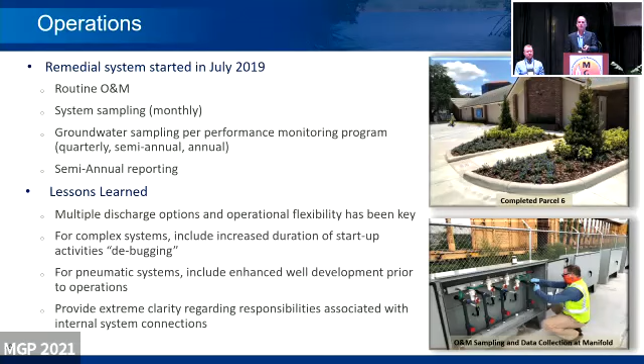Some results - this is basically their first year of operation. We treated over 3 million gallons of water. This is the groundwater outside the barrier wall. The footprint of the plume has been reduced by 41%. We've got a potentiometric surface that minimizes stagnation. We see strong concentration reductions of our primary COCs, benzene and naphthalene.

The SVE system is providing the desired vacuum influence under the buildings, even though we really don't see much. It's sort of just that the PRP group wants it because it represents a safety element.

The barrier wall has effectively isolated that source area. We basically pulled the water table down inside the barrier wall, and we have pneumatic pumps hanging at that depth that basically don't pump anything anymore. So it's really showing we've isolated that system.

This project involved about 70,000 hours of work during the remedial action implementation with zero OSHA recordables. We're proud of the safety record of Geosyntec and all the subcontractors and contractors. They did a great job safely implementing the work out there.

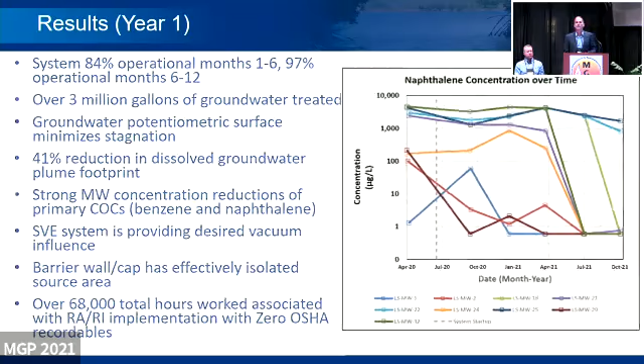The benzene, again, you can see some good reductions in concentrations over time. We're not trying to get this site down to essentially zero, that's for sure. The goal is to reduce concentrations down to at or near Florida's natural attenuation default concentrations, or a point where we reach asymptotic stability, so we can petition that we've got a stable dissolved plume area.

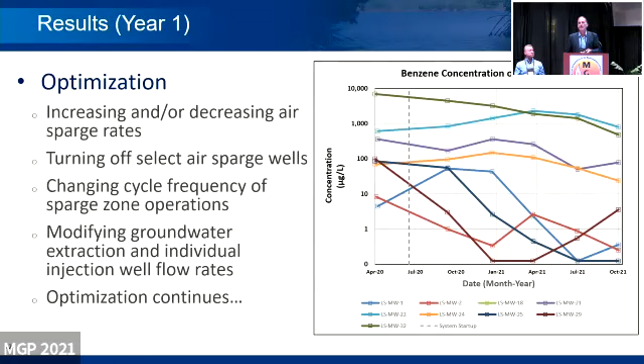Optimization's been key. We increase and/or decrease air sparge rates where needed, and we've turned off sparge wells in areas where the groundwater is cleaned up - we don't need to be running them there, putting more air where we do need it. We're changing the cycle frequency of our zone operations, how we cycle and pulse the sparge system. Based on what we're seeing, we can respond by increasing frequencies, duration, contact time, actively as we're doing our O&Ms. Same thing with groundwater extraction and injection rates - how much we're extracting, where we're extracting from, and where we're injecting it. We keep changing and moving things around, continuously creating that dynamic subsurface environment and continuing the optimization process.

Just a closing shot - at this site you used to have a groundwater potentiometric surface that was just straight north-to-south groundwater flow. You can see with the barrier wall and the contouring around it, we've got a lot of aggressive water movement going on around that barrier wall now, without stagnation zones.

On the right is a depiction of what's going on with the plume. As you'd expect, the overall dissolved plume hasn't dropped because we're not remediating the overall dissolved plume - we're treating the higher concentration areas. The pink to red is one year of the remedial goal objective concentrations, but down towards the higher concentration areas near the wall, you can see the change. The light green was our natural attenuation default concentrations of benzene and naphthalene; the dark green is where it is now. The light blue was our baseline; the dark blue is where we are now.

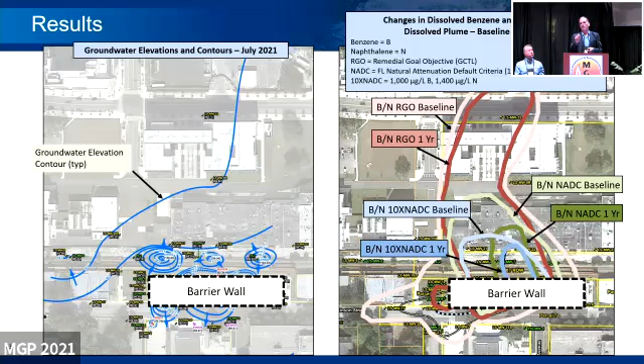On the southern and southwest side, you essentially don't see much because that whole plume to the south and southwest is essentially gone. There's only one well on the south side of the barrier wall that has low concentrations remaining in it.

I think that's all I have for you. Again, I tried to take 7 years of information and cram it into a 20 or 30-minute presentation. If anybody has any questions, I'd be happy to answer. Thank you.

So the historic bricks, you counted them and then threw them away. What was the story behind that? Yeah, I almost need to have a beer to have a story about the historic bricks.

The road is paved, but there's historic bricks underneath it. Any city wants those bricks because when they do redevelopment or clean up other areas of downtown, they want bricks in their brickyard for restoration work. The PRP group was arguing that those bricks are potentially impacted media, so they cannot end up in a potential playground.

The city basically said, well, you then have to replace the bricks that you're getting rid of. We said the bricks were under the road, you weren't using them anyway, but they said we may have in the future. So we ended up having to do geotechnical analysis on the bricks, get specs on them, and find a source to purchase historical bricks that met or exceeded the spec and looked the same as the bricks we removed from the road.